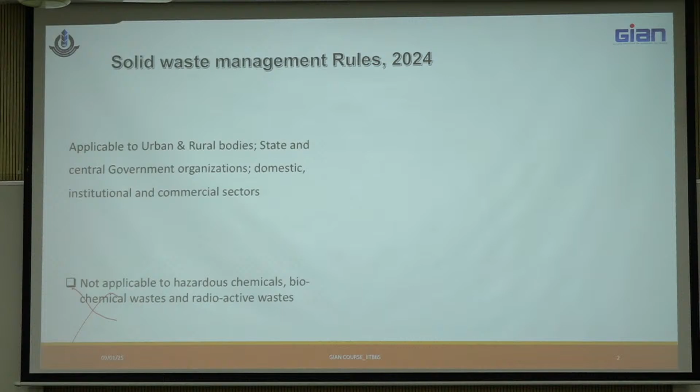Now with this latest amendment and advancement in the solid waste management rules, we are focusing on proper waste management with circular economy in place. Because in earlier days, we used to think of disposing of the waste so that it is not harmful to the environment, right? So it was more focused on a linear economy: waste generation at the source, treatment and disposal. Now we have to reduce that disposal part, landfilling of the waste even after treatment, and we are trying to include the circular economy concept so that we can generate some revenue out of waste.

So you might have heard so many terms: waste to wealth, waste to energy, trash to cash, right? Because we have to implement that circular economy and gain some revenue out of waste instead of just disposing it onto land. And more strengthening will be coming in the monetary aspect for penalizing the defaulters. And no sector is excluded. Waste management is not only the responsibility of urban sectors. We have to look into rural areas as well for the overall improvement in environmental quality. So all of us are responsible for waste segregation from source, and as waste management engineers, we are responsible for implementing circular economy in waste management.

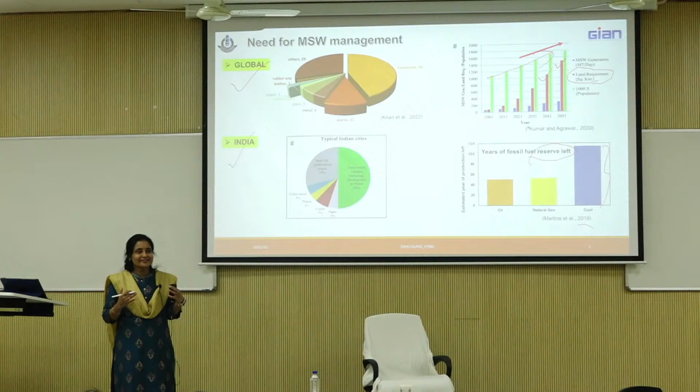And coming to the other aspect, the use of fossil fuel. So advancement in, say, vehicular transport, industrialization is demanding more and more fossil fuel in coming years. And if you see the fossil fuel reserve left, as per the study in 2019, so we are around 5 years ahead from this study. So even this study says the maximum coal reserve is up to 100 years, and natural gas and oil reserve is for less than 50 years. But we cannot think of a life without coal or fossil fuels. What if the reserve is no more? So we have to always think of an alternate coal or fossil fuel. But where is the source? Naturally, to generate the fossil fuel, it takes millions of years. So let us think of our waste to be converted to an alternate fuel, either solid or liquid residue.

So this is the waste generation. The predicted waste generation in a global average by 2050 is around 3.4 billion tons. So if you see the current scenario in India, we have around 62 million tons of waste generated per year, averaging to around 1 kg of waste generated per person per day, right? And most of this waste collection is not done, and from the collected waste, around 90% is only treated. So by keeping into account the less land availability, more waste generation, depletion of fossil fuel reserve, let us think of the opportunity for waste to energy conversion from the ample source of resource, that is the waste generated from different parts of the world.

Now, if you need to convert waste to energy, especially through thermochemical conversion techniques, it has to meet certain criteria. So as per the rule, it says non-recyclable. As I mentioned, we have to go for reduce, reuse, recycle. So if the 3R fails, the rest non-recyclable part of waste, which has a calorific value of at least 6.3 megajoules or more, can be utilized for generating energy. So this has a potential for converting into energy through thermochemical routes. It can be directly used as a fuel or can be converted into RDF by suitable pretreatment technique.

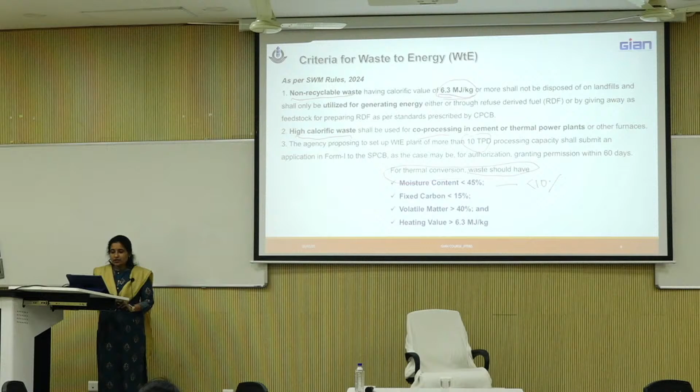Okay. And the next is fixed carbon content. Fixed carbon content should be 15% or less, and volatile matter should be more, because this is the volatile matter which is being converted to fixed carbon during the conversion process. So volatile matter content should be more, and as mentioned earlier, the heating value should be more than 6.3 megajoule per kg.

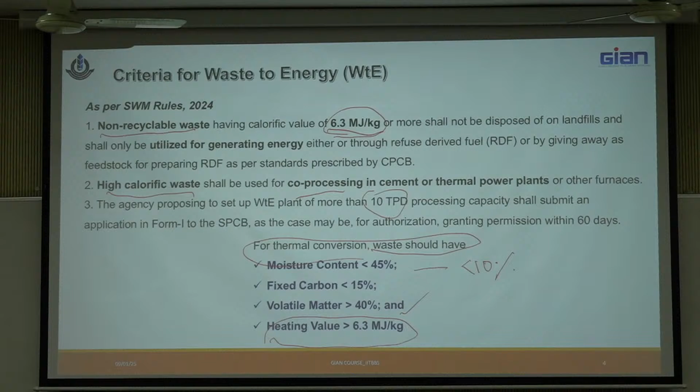So if any non-recyclable fraction of waste is meeting these criteria, you can think of waste to energy conversion. And if the capacity is more than 10 ton per day, get prior approval for setting up the waste to energy plant. So I'm just reiterating the same thing.

What is the need of MSW management, and waste management by generating energy out of it? The increasing population, increase in waste generation, and imbalance in the waste management sector is one aspect. And industrialization and energy demand in par with the depleting fossil fuel reserve demands more energy sources. So let us put these two together to make our waste to energy conversion a demanding area.

And this waste to energy conversion can address the imbalance in waste management as well as the depleting reserve, so that the waste is managed properly and the energy demand is met by the energy created out of the waste to energy process.

So just addressing two major SDGs, we can say affordable and clean energy from the waste converted through different processes to energy. So it can be thermal energy or the solid or liquid biofuel or biochar that is produced from the waste to energy conversion process. And of course, it can give sustainable cities and communities, clean cities.

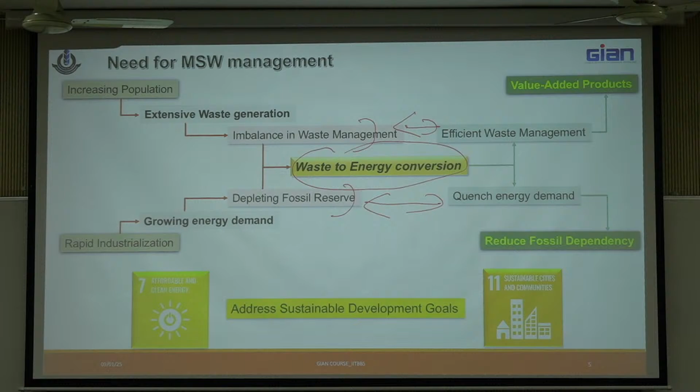So this directly caters to these two sustainable development goals, and indirectly it is meeting many other SDGs, for example, health and hygiene, right? So all this is met if you go for waste to energy conversion techniques.

Now, where can we use the RDF or even the agro residues directly, right? So if you are thinking of a waste to energy plant, who will be the buyer for the converted product of your waste to energy facility? So if you have the segregated combustible fraction from MSW, SCF, or even many of the agro residues have calorific value more than 6.3 megajoule per kg.

So in par with our SWM rule, this can be used as a fuel in boilers or thermal power plants. Or if you want energy densification, we can go for converting this into RDF, as I mentioned previously, by removing the moisture, shredding and size reduction. Pelletization or compaction can be done for energy densification.

And if you are doing energy densification, we are getting high energy content, which is in par with the conventional fuel used in thermal power plants or cement kilns. So we can go for the intended application, like it can be used in boilers for heating if the energy density is comparatively less. The densification can cater its use in cement kilns or thermal power plants, either as a sole source or co-processing with existing fuel like coal.

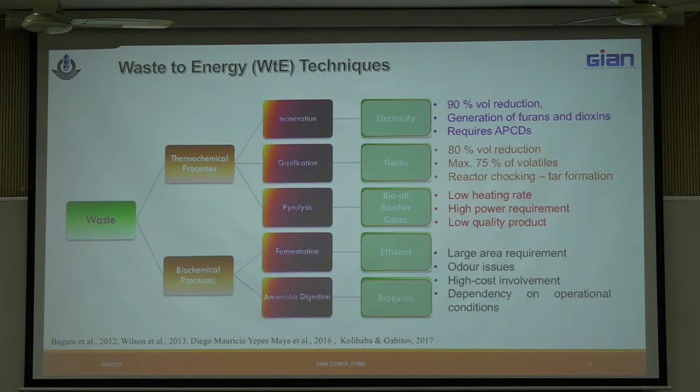So it is left to the wisdom of the waste to energy operator to go for a suitable technique catering to the type of waste and the operating conditions that you can maintain. So if you see the existing commercial waste to energy plants, we have many incinerators, which take the combustible fraction of waste. And coming to the biodegradable fraction of solid waste, anaerobic digester is common, or I can add even composting to it. Right? The 2 major streams to cater: the non-biodegradable waste and biodegradable waste.

But if you see these waste to energy techniques, especially if you go for incinerator, it is not carbon neutral, because we are depending mainly on the electricity. We need to go for auxiliary fuel for still burning of waste, especially for removing the moisture content and so on. And if you see the anaerobic digester, it is a slow process, or it may require large area. And most of the waste to energy techniques in place at present are centralized facilities. So what is the drawback with centralized facility?

Continuous supply, air pollution. So if you have a centralized technique, transportation, right? It involves high storage and transportation cost, because if you see the nearest facility, and this campus, IIT Bhubaneswar, is the source of waste generation, and if I want to transport the waste generated to Bhubaneswar city, you can think of the transportation cost, the pollution involved during the transport, right? And of course, for transport, we are again depending on fossil fuel, right? So this involves high transportation cost, storage cost, and the centralized facility.

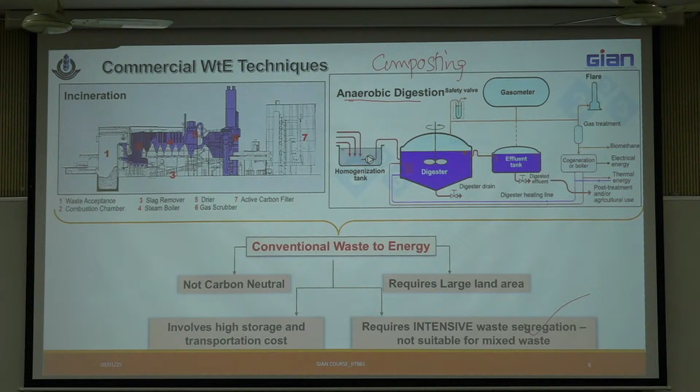Segregation is the major issue, and we are trying to make different ways of segregating waste, again emphasizing the solid waste management rule, the waste segregation from the source. So this is a typical case study of a material recovery facility in Bhubaneswar. Bhubaneswar city again emphasized waste segregation from source.

The wet waste and dry waste is separately collected, and the waste that is arriving at this MRF facility is further segregated, because even if you go for a wet-dry segregation process, the wet waste is collected in a plastic bag, right? The food waste is collected in the LDPE, the garbage bag, which is plastic. So again, we need to go for one segregation at the facility, and the biodegradable fraction,

which is going to AD or compost, anaerobic digester or composting process, to get the humus or compost, and the rest of the combustible fraction or non-biodegradable fraction is compressed, densified, and used as RDF, refuse derived fuel, and this finds its way to the nearest cement kiln in Bhubaneswar city.

But if you see the economics of operating this waste management facility at Bhubaneswar, the expenditure per month, which includes the salary of the manpower, human resource, consumables, electricity cost, vehicles for collection of waste from different corners of the city to this MRF facility, totals around 18 lakhs per month in one composting facility or one MRF facility in Bhubaneswar. We have many such facilities in the city.

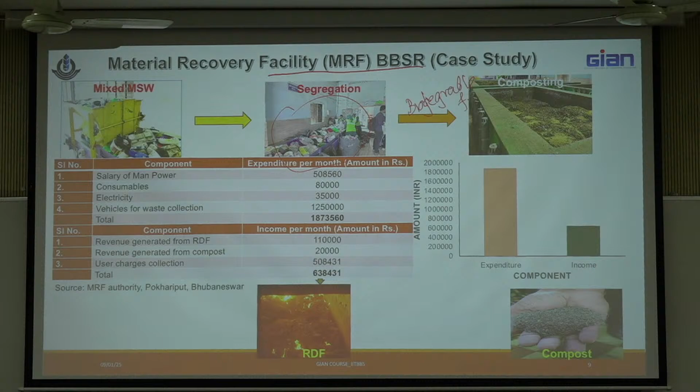So there is always a need of advanced techniques. There is no single solution to cater to all this, but let us search for a facility which can take mixed waste, convert it into value added products, and with the same process or technology deliver a variety of products based on the feedstock coming to that facility, and of course in a quicker manner: rapid conversion with good quality end product, easily controllable operating parameters, and of course profitable, right? At the end we need money.

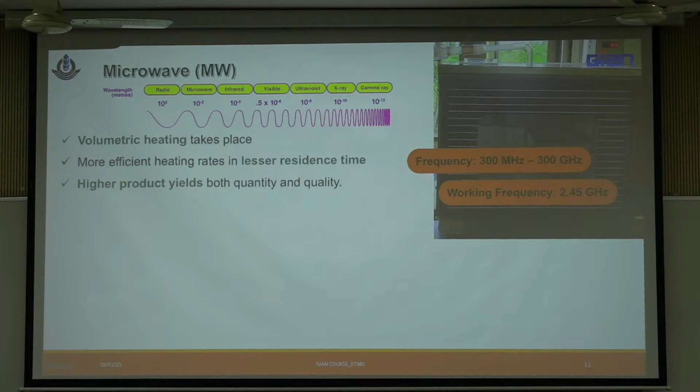So we are looking at whether microwave assisted pyrolysis can address a few, many, or all of these requirements for our waste to energy facility. What is microwave? All are familiar with the microwave oven, but where does microwave lie in the electromagnetic spectrum? It is of high wavelength, 1 millimeter to 1 meter. The energy of microwave as such is very less. You may be familiar with using UV, ultraviolet rays, because its energy is high, so it can disrupt chemical bonds, right? And even pollutant remediation can be done with UV.

Microwave is a comparatively lower energy region, but it has some specific heating potential. It has the heating mechanism of dipolar polarization. This is how the dipole will get reoriented in the microwave to get the medium heated. And the other one is conduction mechanism, by the free electrons that can move in the medium on irradiation of microwave. And interfacial polarization is a mix of the dipole orientation and conduction mechanism.

So consider pure water, mineral water and tap water. If we keep them in the microwave, which one do you expect will be heated up? Say demineralized water, no minerals, and on the other side tap water with a lot of minerals or pollutants. Tap water: here the mechanism is conduction, and if you have some dipoles, the dipolar orientation can also help in heating up the pollutants.

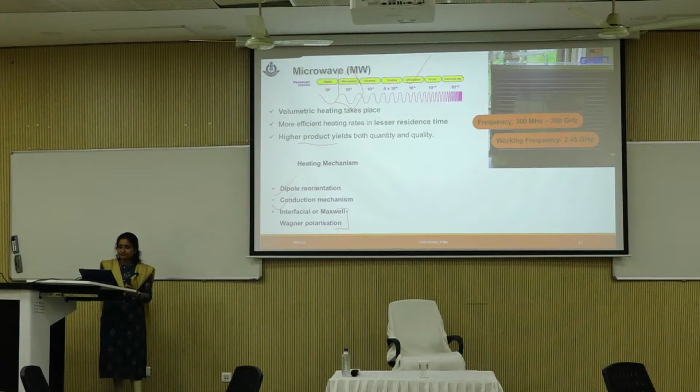So if you see the temperature profile inside the microwave reactor versus a conventional heating process: in a conventional heating process, heating is by conduction, so the periphery is heated first and then the interiors. It is just the reverse in the microwave reactor, inside out, not the movie, it starts from the atomic level and goes towards the periphery. But will all materials be heated up with microwave?

No. So can I use all types of waste to be converted by microwave assisted pyrolysis? No. If not, again the segregation will be an issue, right? So how can I segregate the collected waste based on which can be heated by microwave and which cannot be heated by microwave? Should I go for that?

See, we are going for a technique which can avoid segregation of waste. And now if you tell me I have to segregate the waste based on which will be heated up or not heated up by microwave, I cannot address the issue.

For example, I can say food waste, right? Biomass will be heated up by microwave because it has carbon content. Carbon is a good absorber of microwave. You can even expect a temperature of more than 1000 degrees Celsius with a carbon containing material in microwave. It has a specific phenomenon called hotspot formation.

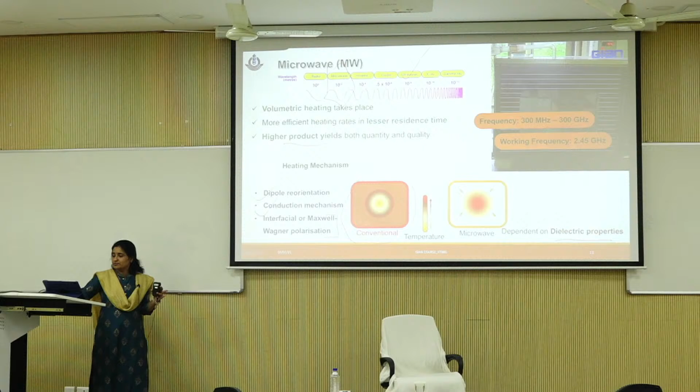So I can make a material which cannot be heated up in microwave be converted by a microwave assisted process, provided I use a microwave absorber or susceptor. So here is the role of the microwave absorber or susceptor. If a non-microwave absorbing material has to be heated up in a microwave oven, we can think of a susceptor. Now what is a susceptor? It has a good dielectric property.

So here let me take you through the dielectric constant. So what is dielectric constant? It is the ability of a particle or a material to absorb electromagnetic radiation. The electromagnetic radiation we are talking about here is microwave, right? And the dielectric loss factor is the amount of the absorbed electromagnetic radiation that is converted to heat.

Now I have a term here, loss tangent. So the loss tangent is high. What does that mean? The equation for loss tangent, you can see, epsilon double prime by epsilon prime. So what if the loss tangent is high? Conversion is high. The absorbed electromagnetic radiation is mostly converted to heat. So if I have a material with good loss tangent, we can expect an increased temperature profile inside the microwave.

So these are different properties. It should have good dielectric property, that means it should absorb microwave. It should have high loss tangent, that means the absorbed microwave should be converted to thermal energy. And the thermal energy should be dissipated easily to the biomass or the waste that you are converting. And while doing all this, it should be thermally stable as well. So we should think of a microwave absorber or susceptor inside your reactor which can cater to this.

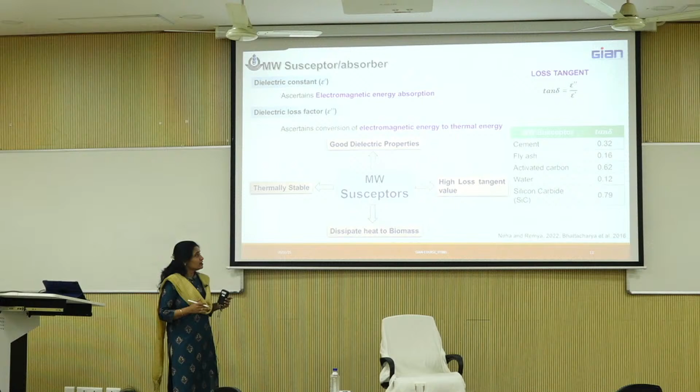So we have tried several such materials: cement, fly ash, activated carbon. Carbon is always a microwave absorber. We will not add water into waste, but water content in the mixed waste can also act as an absorber in your microwave pyrolysis process. And silicon carbide; now we are using zirconium alloy, which has an even higher loss tangent than silicon carbide, to increase the heating profile.

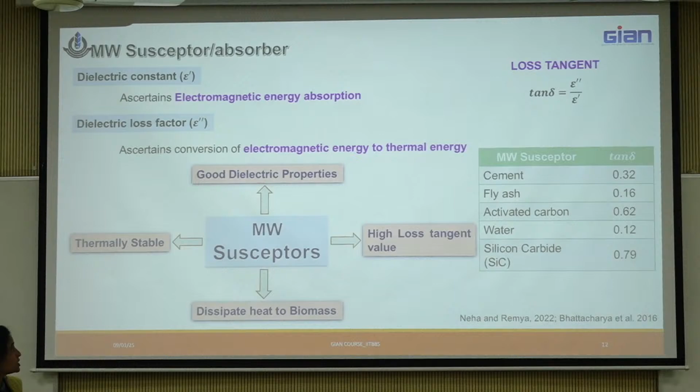Yes, so we can use microwave for waste to energy conversion, even if the material cannot be heated up by microwave, by using a suitable absorber or susceptor, and by setting the temperature. Here I am not going into pressure based technologies. Hydrothermal liquefaction and hydrothermal carbonization are pressure based, but here just by playing with the temperature we can convert the microwave assisted technique into torrefaction, pyrolysis or gasification. It mainly lies in the temperature range, and we can fix the microwave power range so the temperature is retained within the required limit.

For example, if I go for comparatively lower temperature, say 200 to 350 degrees Celsius, we can think of using lower microwave power and longer residence time, so that volatilization will not happen, rather it is carbonization to give you biochar. So you will yield more solid residue if you go for torrefaction.

Pyrolysis, again, has three variants: flash, fast or slow pyrolysis. All this differentiation is because of the heating rate, and the heating rate is because of the microwave power that you select. So of the three variants, slow pyrolysis will yield more biochar, fast pyrolysis bio oil, and flash pyrolysis is on par with gasification to yield more gaseous product.

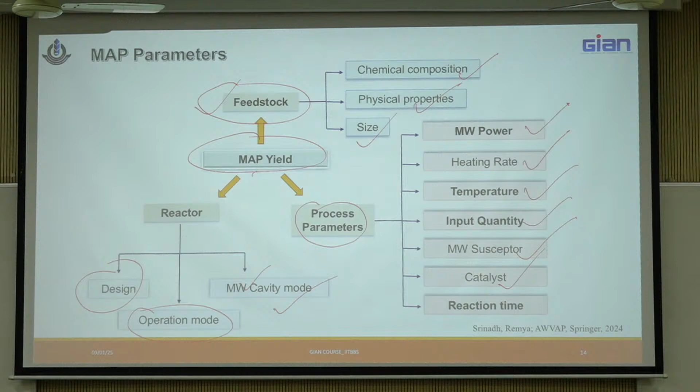Now coming to the process parameters, yes, here we can play some role, because we have little to do with the feedstock, and so is the reactor fabrication. So in the operating condition, you can think of setting the microwave power. Heating rate can be controlled by using suitable susceptor or microwave power, and what temperature you want to do the conversion process, quantity of feedstock taken per batch, which susceptor you are using, or you are going for an additional catalyst or reaction time. All these can play some role.

And of course, again, the end products. I will not spend much time here because this was the point of discussion in the last session as well. The biochar can be used for soil quality improvement, or it can be modified to use it for water and wastewater treatment, and it can be used for electrochemical methods because it can be used as an electrode, good conductor, and of course as a fuel.

And coming to bio oil, again it can be used in pure synthetic chemical production, or can be used as fuel for petrochemical industries or power generation. So keeping this, we are doing different microwave assisted pyrolysis for a variety of feedstock. We started the microwave based study around 2007 or so, and now we have done the conversion of different varieties of feedstock, starting with food waste, crop residue, forest residue, polyculture, microalgae.

So here we have isolated microalgae from a nearby pond. It is a mixed culture, and then it is grown in wastewater, specifically grey water. So grey water was the medium for microalgae. The grey water was treated, microalgal growth happened, and the microalgae was then converted to biofuel. So it's gone through a stepwise acclimatization process and so on.

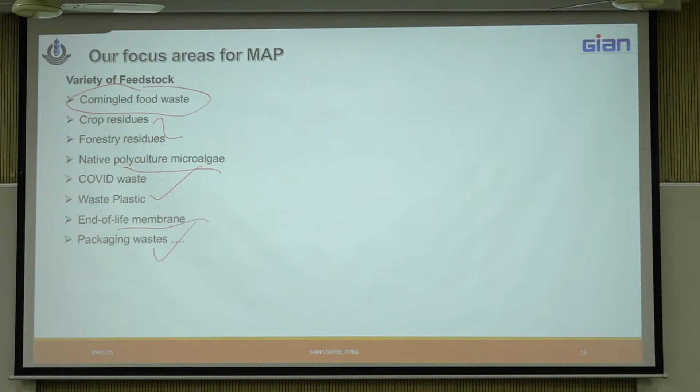Why mixed food waste? Because we are emphasizing on segregation. As I mentioned, we have a lot of food waste generated, starting with the non-eaten, or the different supply chain of food production, starting from the crop production, processing, then the food processing and so on. So a lot of food waste is generated, and plastic, once it is no longer in use and discarded, we call it plastic waste, because we have to reuse as far as possible.

So most of the time we get food waste and plastic waste together in the dustbin, right? So if you want to take this to a biological treatment process, the bare minimum thing you need to do is the separation of the garbage bag from the food waste. So we just thought, instead of disposal, dumping, landfilling with its own pros and cons, why can't we convert this mix as we collect it from the garbage bin in a MAP reactor into end products.

So I'll just present a few of these results from the study of converting the mixed waste through MAP into bio-oil and biochar. As we know, food waste is not uniform in nature. The waste you get today in the dustbin is not the same as tomorrow. So we just thought of collecting an average food waste composition. And you can see there is a lot of variation.

Now, if you want to go for thermochemical conversion technique, I think this question was pondered in the last session also: what can be the first step to understand your waste for its thermochemical conversion potential? To me, it is the TGA. We can perform the thermogravimetric analysis and see the degradation profile of your feedstock with respect to temperature.

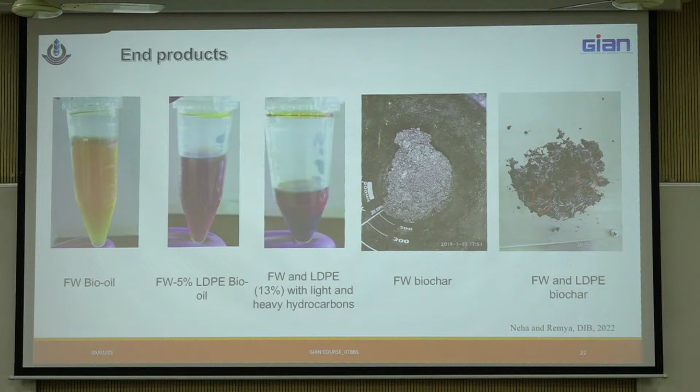Now coming to the optimization, process optimization, we can think of optimizing the operating parameters. So here we have tried with the temperature, percentage of LDPE in the feedstock, and the residence time to get the maximum bio-oil yield with minimum total acid number, TAN. Higher the TAN, more will be the corrosivity of bio-oil. So we have to reduce TAN and increase bio-oil.

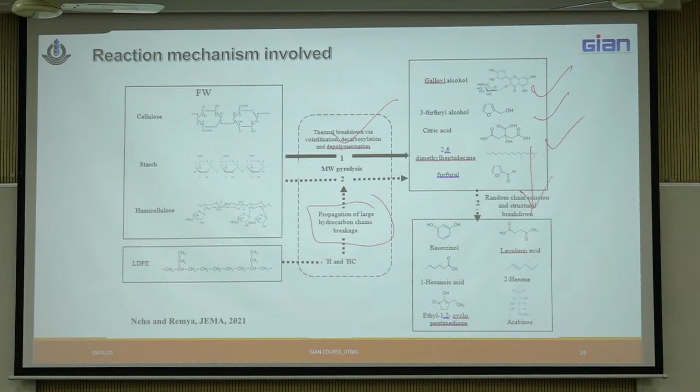So if you extend the time, this is again by cracking or thermal degradation, we got different products. While extending the time, we can expect further cracking of the product generated in the first stage to yield you more and more end product by scission of the long chain hydrocarbon. But at times, as we have seen earlier, the bio-oil from food waste is mostly moisture, and even with 5% LDPE content, the quality of bio-oil is not that good. So we can think of upgradation of bio-oil.

So this is what we have done for upgrading bio-oil to biodiesel or biofuel standard. The bio-oil is taken through a hydrodeoxygenation process, HDO process. The main aim here is to remove the oxygen-containing functional groups or the oxygen as such from the bio-oil, so that the heating value can be improved. So we are adding hydrogen at high pressure, high temperature condition in presence of catalyst, so that oxygen is expelled out from your bio-oil to improve the quality. And different reaction mechanisms are involved: hydrogenolysis, hydrogenation, dealkylation, dehydration, so on and so forth.

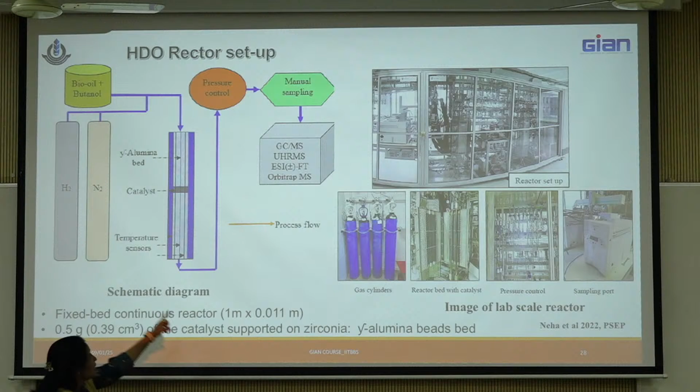So this is the HDO reactor setup. In this HDO reactor setup, you can see the bio-oil is mixed with butanol. Butanol is used to reduce the tar formation or increase the fluidity of your bio-oil. And then this is taken through the column of alumina bed, making the bio-oil flow smoothly through the catalyst. And the catalyst, again, we have prepared our own catalyst, which is supported on zirconia, and this is housed inside the alumina beads. You can see the entire column of alumina beads with the catalyst, which was supported on the zirconia bead. And this was regulated by temperature and pressure. So we checked the effect of different temperature and pressure on the quality of upgraded bio-oil.

So this is the actual reactor setup with different components taken separately. So the gas cylinder, this is the inside of the reactor column where the catalyst is placed, pressure control panel, and this is the inline GC-MS, so that the end product quality can be assessed.

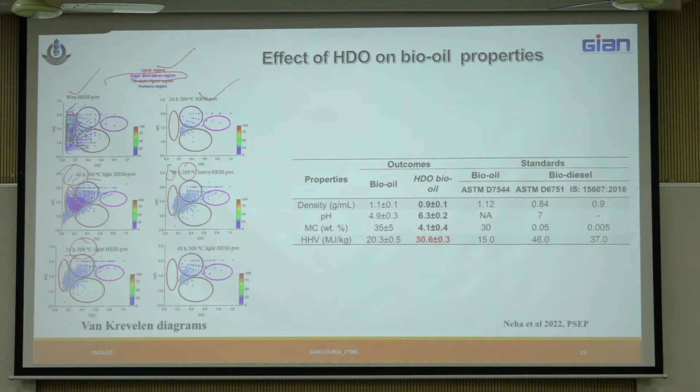So it means the quality is retained even after 60 days of storage, or I can say the stability is improved by the deoxygenation process.

Now this is the biochar. So the main focus of the study was on bio oil production, but as I mentioned earlier, we cannot expect only biochar or only bio oil from this. What we can do is maximize one particular end product. And here we are dealing with food waste, so I cannot expect 70% of bio oil coming from food waste. What we could get was around 40% bio oil and 40% biochar.

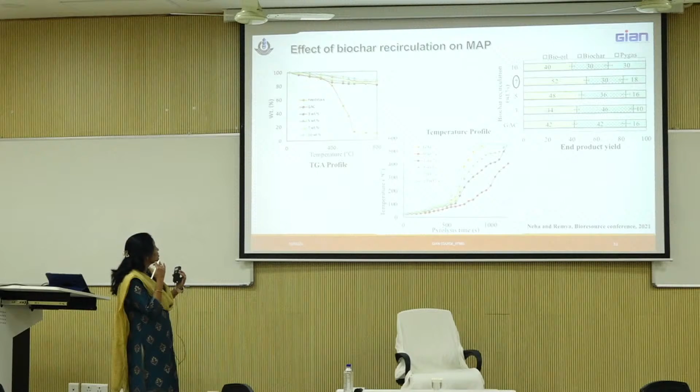So this is just to show the role of different susceptors. As we mentioned earlier, we can use GAC as susceptor, any carbon material for that sake. If you are not aware of which susceptor to use, you can just think of carbon, the best friend of microwave. So here we have used GAC at the first stage, and you can see the heating profile with increasing GAC, and the first run of MAP is giving you biochar and bio oil.

What to do in the second run? Again I will add GAC? Yes, biochar is again carbonaceous. So we thought of recirculating or reusing the biochar from the first cycle as a microwave susceptor in the second cycle. Increasing the percentage of biochar is increasing the heating rate. So you can rely on your susceptor in the first run of your microwave pyrolysis and try to use the biochar in the subsequent run as susceptor. This is giving a good heating profile and a better quality biochar as well.

So this is the TGA profile of the biochar obtained from different runs. So it's a stable biochar by recirculating. And if you see here the end products, with 3% biochar recirculation, it's almost 50-50 for biochar and bio-oil, 44% and 46% bio-oil and biochar.

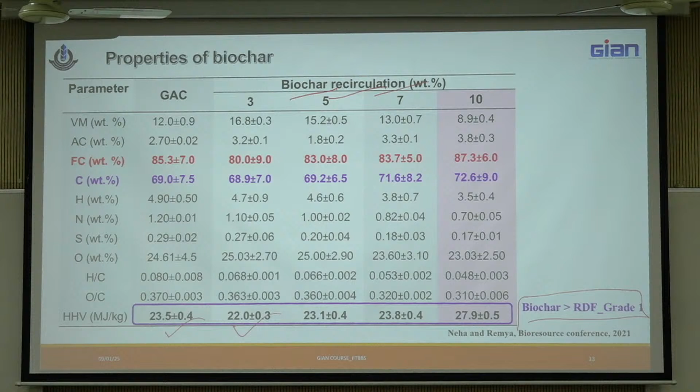So this is again the property of the different biochar. I'm not going into detail of this. I'll just mention that each of these biochars using different recirculation ratios of biochar in the subsequent run was giving very high heating value of biochar, much more than even RDF grade 1. Yes, we are always ensuring the uniform distribution in the feedstock.

The biochar as such is stable. So if you use it a second time, you are still retaining the same biochar, right? So we could get the improvements. The same biochar can be reused again and again. But the thing is, from the second round, we are getting a new set of biochar, right? So again, take a fraction of this and recirculate.

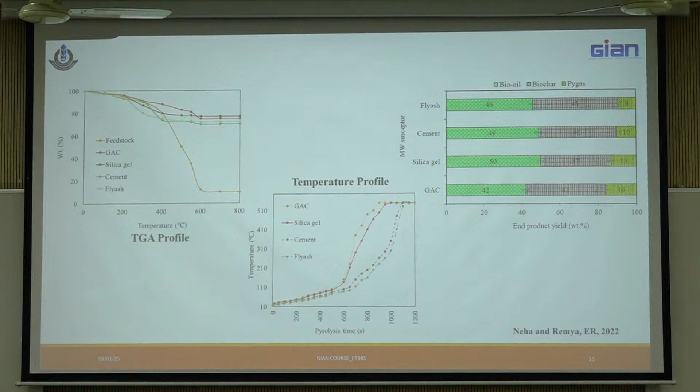That, I think, may be for a catalyst. So I have mentioned here. If you are using it as a catalyst for wastewater treatment, initially you have a biochar with some surface properties, surface functional groups, porous structure, right? If you are using it for water treatment, your pores may be clogged with pollutants. So maximum 1-2 times you can recirculate if it is an adsorption process. Otherwise, you have to regenerate the biochar for subsequent use.

But when you are using it as a susceptor in the microwave reactor, you don't need to bother segregating. Whatever biochar you get in the second run, you just recirculate a fixed percentage of that into the subsequent run.

My question is, how can you continuously heat the same biochar? Because in the first set you have biochar produced, right? A part of this you are recirculating with the new feedstock. So you get a new set of biochar. Now from that you can take a few percent of it and recirculate it with another set of feedstock. So new biochar is obtained. Because you cannot think of the same biochar in the MAP process. It is mixed with a new set of feedstock to give you a new biochar.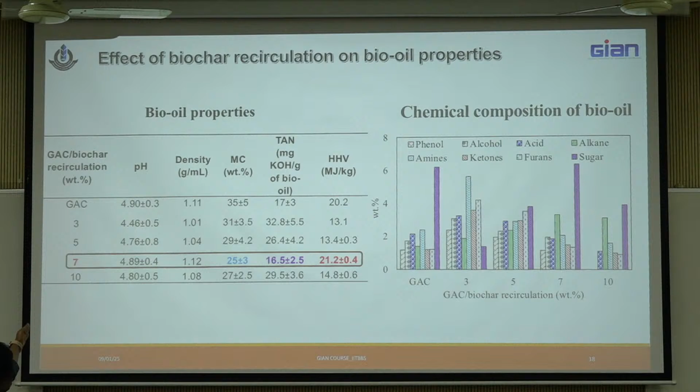So this is again the bio oil property compared with different standards, and as I mentioned, with different susceptors, with the different recirculation ratios, the quality of end product varies. The bio oil quality you can see with different percentage of granular activated carbon or 3 to 10% biochar recirculation, the pH, density, moisture content and so on. And so is the individual chemical composition in bio oil.

As far as our research is concerned, we are not looking into individual component fraction, but overall what is the pH, TAN value or heating value. So those who are doing research in synthesizing pure chemicals, they can focus on more detailed analysis of chemical composition as well.

So in a nutshell, this is what we are doing in the MAP process for waste to energy conversion. Take any waste for that matter, check its initial characteristics, do the TGA profile and see which temperature is suitable for its conversion. You can directly convert that into biochar or pelletize it to convert into biochar pellets. Those who are doing pelletized fuel formation, I'll suggest you go for pelletization before the microwave pyrolysis process, because it is very difficult to convert your biochar to pellets. You may need to add separate binders.

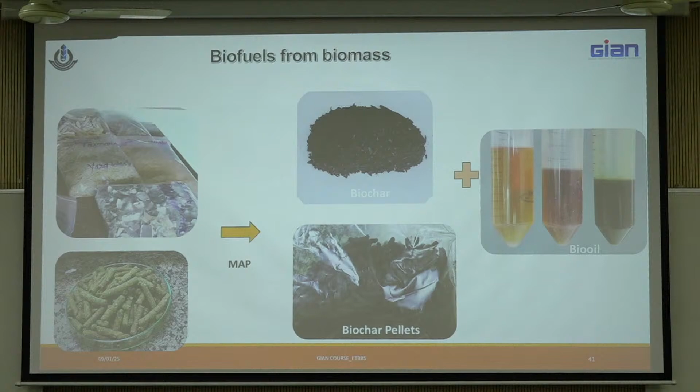So here the uniform heating, the credit goes to the carbon content in your feedstock. Because biomass has high carbon content, we can expect uniform heating. Even with pellets, we could get the uniform heating of the biomass. It is not a single time; different times were used. 15 to 20 minutes was the maximum time we have used for all this MAP process, not beyond.

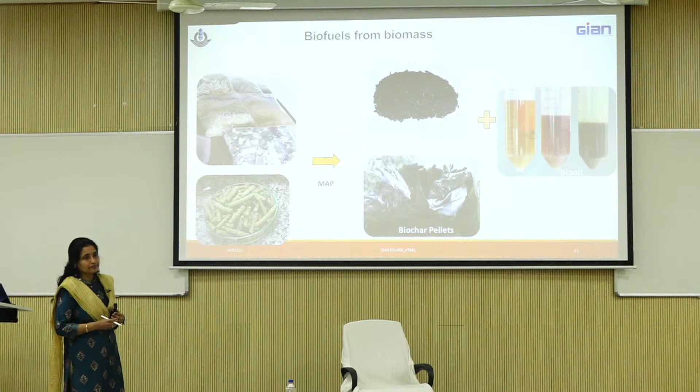So I hope now you will agree MAP has some role in waste to energy technique. Let us think of the waste that is coming from, say, agricultural residue, or even residential or commercial sources like food waste or plastic, or the waste from some industrial process. Let us take it through the MAP process, microwave assisted pyrolysis. Optimize your process for biochar production, oil production, or syngas production based on your aim, and then utilize it for subsequent processes. For example, biochar you can use again for industrial application as fuel, or it can be used in agriculture.

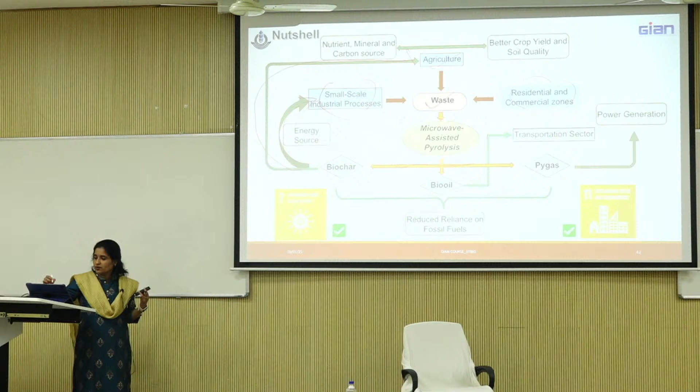It can be used as a slow release fertilizer in agriculture, or it can improve the water holding capacity of soil. So it has its way in agriculture as well. And coming to bio oil, from some feedstock the bio oil as such can be used as a fuel, or think of upgradation to use it as a fuel in transportation vehicles, and of course the pygas for power generation.

I hope we'll stop here, and this is the video of our pilot scale microwave pyrolysis reactor, which is completely working on solar power. It has a shredder mounted on the surface, which can shred your feedstock into the required size, and we are converting anything and everything that we get, trying to optimize the pyrolysis condition to convert it into value added end products.

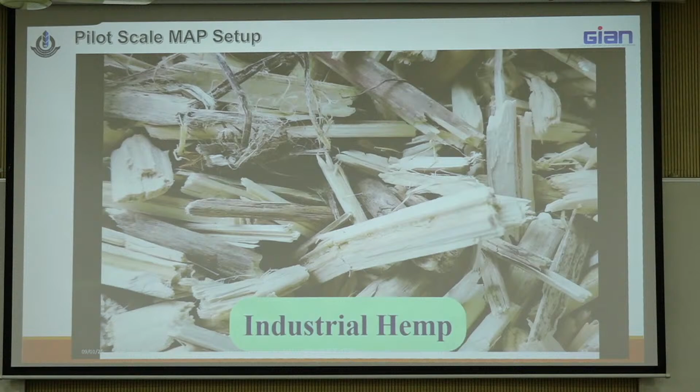So these are a few feedstocks: plastic waste, hemp hurd, packaging waste, and these are some pellets which are later converted into biochar.

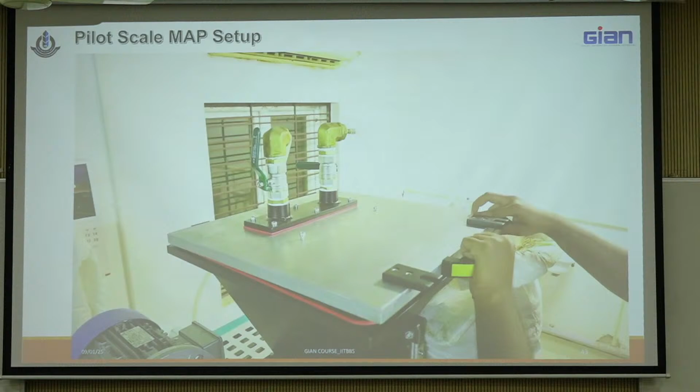So this is the membrane material from end of life RO membrane. We have used it again to convert this into bio oil. So this will be shredded. Agricultural residue can be shredded in the shredder, and it will go to the pyrolysis reaction unit.

We have full process control to set the temperature, reaction time, and there are 30 different steps of setting the temperature and reaction time. So if you need a step temperature profile, you can have the temperature profile as per requirement. So this is the nitrogen flow regulator to make inert atmosphere inside the reactor.

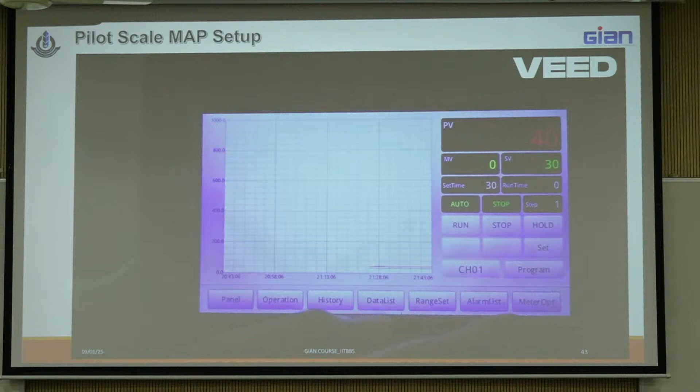The control panel to set the temperature at different steps. So you can set a step temperature profile as you need, and decide your reaction time, and we have 4 sets of magnetrons. That means it can operate in 6 kilowatt or 3 kilowatt based on the quantity of feedstock you need to process. And these are different end products obtained from the MAP process.

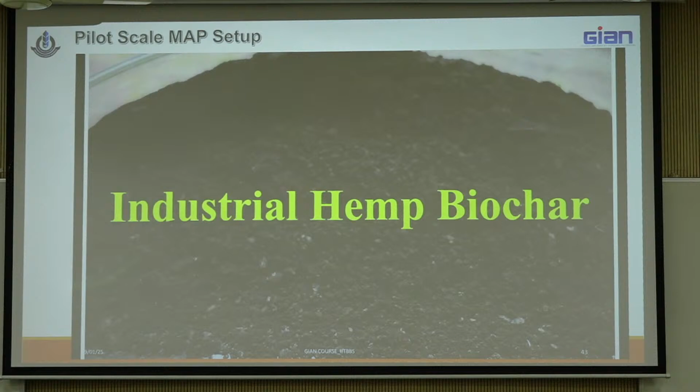The oil collection unit with 3 condensation units. So sometimes we can get even 3 different qualities of bio oil that are condensed in the subsequent condensation units. So these are some of the end products. Biochar from sawdust, the pelletized biochar. And various bio-oil fractions from multiple feedstocks.

We have calculated the net energy gain in terms of the total energy input. That was done for the lab scale reactor which was operating with electric energy, right? The energy input and the energy output in terms of the heating value and the yield of product. So most of the time you are getting a net energy gain of more than 100%. That means the energy input, what we give, in terms of calorific value, yes. At the optimum condition it is more.

Yes. See, again the microwave can take the water because water is a microwave susceptor, but then the quality of end product may vary, especially if you are going for bio oil. The feedstock with high water content will yield you bio oil with high water content. Right? So you can think of pre-drying, and we have used sun drying to reduce the electricity consumption. Up to 30% water content can also be easily taken into the microwave reactor, provided your focus is on biochar.

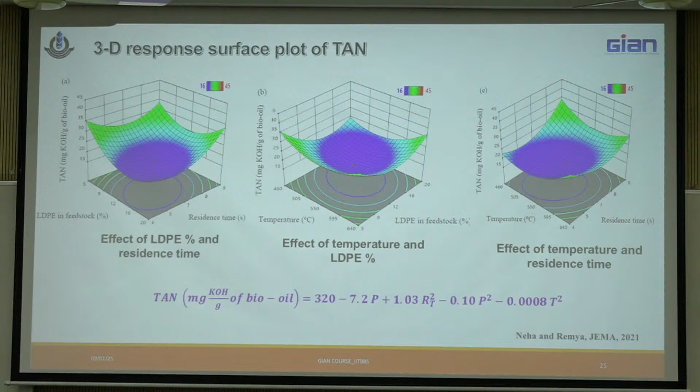P is the percentage of plastic. t is the time, the retention or treatment time, and T is the temperature. Total acid number. The more volatile cracking and its conversion into bio-oil. Okay, thank you.

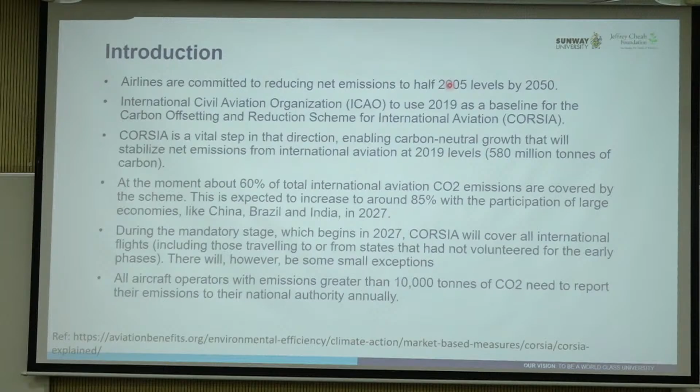So why is sustainable aviation fuel important? Because the airlines already committed to reduce total net emissions to half the level of 2005 by 2050. It seems impossible, because air transport is increasing year by year, besides the two years during COVID, almost doubling every 10 years. So how to cut it in half by 2050?

So they have phase by phase strategies. First, ICAO, the International Civil Aviation Organization, already established one benchmark, one policy, which they call CORSIA, the Carbon Offsetting and Reduction Scheme for International Aviation. So through this, maybe it might be possible. Later I'll tell you more.

This one is a very important step in order to reduce the overall emissions from airlines to half, or even to totally net zero. It is to enable carbon neutral growth. Carbon neutral growth means to remain. First step, to remain, as compared to 2019, not directly to reduce first, but to maintain compared to 2019.

So this is the very initial step, which, I don't know how many countries, this mentions 60%. Some countries already committed to this policy, and starting from this year they plan to implement 1%. I think many countries will be planning, because there is not enough demand. So that is the perspective of sustainable aviation fuel. What is the problem with demand? Later on I will tell you.

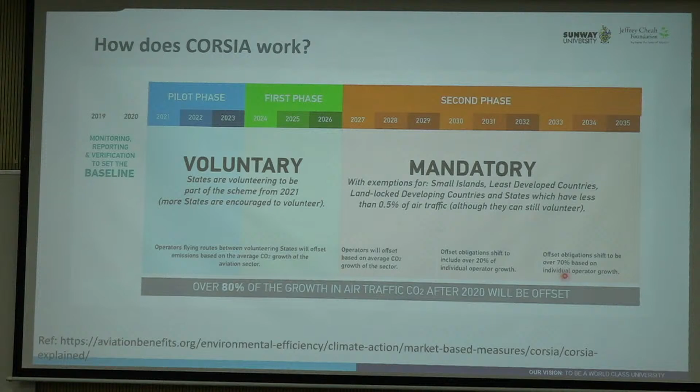So they have their own target, which eventually they will offset up to 70% of the total emissions. So that is the background, and that's why sustainable aviation fuel is important. So now we need to know what sustainable aviation fuel is. It is an alternative green fuel for aircraft, produced using renewable feedstock, for example waste oil and agricultural residues, so that SAF can reduce overall CO2 emissions by up to 80% compared to using fossil-based fuel.

So my initial question: what is the difference between sustainable aviation fuel and biofuel? Biofuel basically comes from organic material, from plants and animals. However, some of the sources are non-biological sources, which makes them not sustainable. Second, during production, we create some harmful emissions that I mentioned just now. So they prefer to use SAF, sustainable aviation fuel, instead of biofuel. What makes them different is not only that we want green fuel, but the process must be clean, and the raw material, the feedstock, must be sustainable.

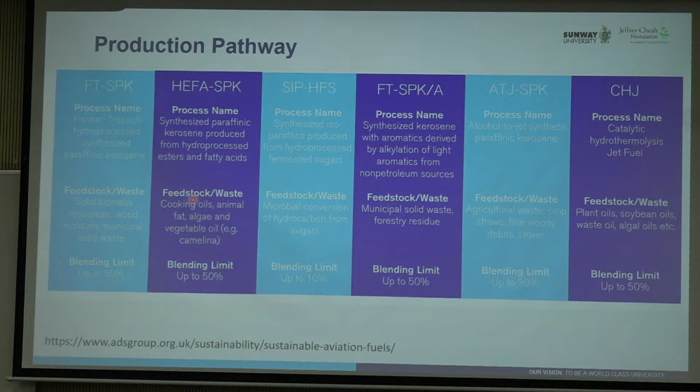What? The minimum can be a single step. For a single step you also need to depend on the raw materials. So for me, I use hydroprocessing, the single step. Later I show you the difference. You see here, they use 1 step, 2 steps, 3 steps from different techniques and different raw materials. So nothing wrong and nothing right.

So it must be much easier, because sometimes with 3 steps, after you convert you can get more pure sustainable aviation fuel. That's the thing. Much easier for you to convert, but a single step faces challenges. So maybe the overall yield might be relatively low. So how do you want to extract out the selectivities? Yep.

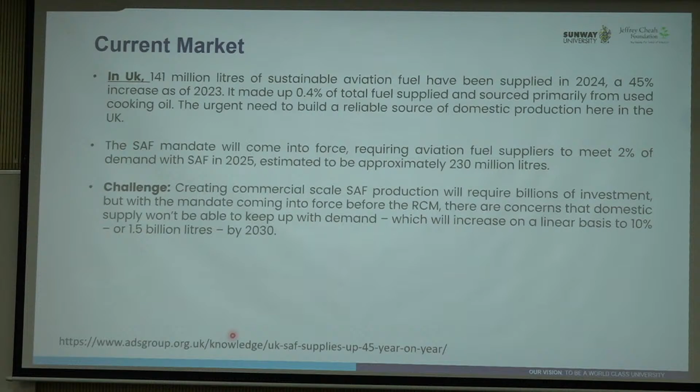If they want to increase to 10%, they need 1.5 billion liters by 2030, as already projected. So that's what the current market is facing. This is the brief introduction to sustainable aviation fuel. Now I want to move on to our study.

In this study, we want to determine what is most optimum. This is an exploratory, very fundamental study to find the potential raw materials available in Southeast Asia, tropical countries, and what potential pathway can produce biojet fuel. I didn't say sustainable aviation fuel first. To get the biojet fuel, we tried a lot of feedstocks and commercial catalysts without modifying the catalyst.

In the second phase, we will identify sustainable raw materials or resources we can use, then the targeted process and targeted catalyst that can reduce the overall CO2 and CO during the process, and get quality biojet fuel. In this study, we want to see the effect of different commercial catalysts and catalyst reusability. This one is more on catalyst activity.

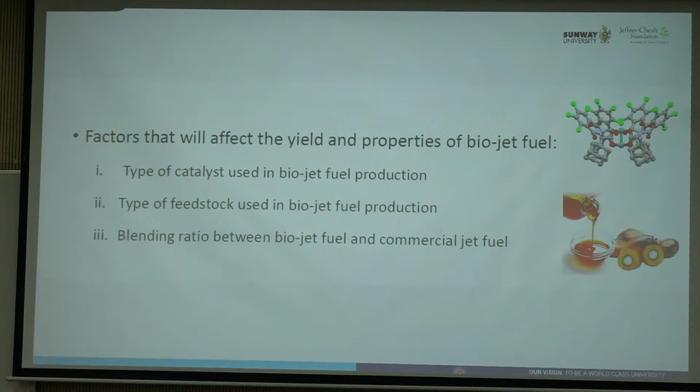So this is our scope. We identified five types of very common catalysts, with various percentages of loading. Then the catalyst reusability up to 5 cycles, to see what the effect is. Then for the feedstock, we identified 3 feedstocks, also related to palm oil, because in Malaysia we produce a lot of palm oil: palm oil based used cooking oil, palm kernel oil and palm olein oil.

So we particularly see which one is more suitable, because we really need to see the suitable selectivities, and the blending ratios we blend from 20 to 100%, increasing every 20%. For the fuel properties, we look at the chemical compositions analyzed using GC-MS, then the low temperature fluidity, combustion characteristics, volatility, and also the lubricity of the fuel we produce. Then another quantification study is the soot particle size. We need to know what the soot particle size is.

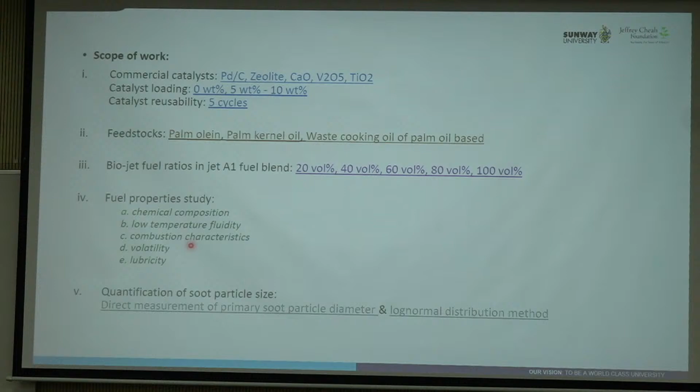So this is the comparison, because before we conduct the study we need to compare with other studies. This study we conducted in 2018, so there are more studies that have appeared since. As I mentioned just now, we are using the hydroprocessing method. Hydroprocessing methods are for oil-based or fatty acid-based raw materials. Comparing the criteria of production, some studies use a 1-step, 2-step, or even 3-step process. Nothing wrong or right. We chose to produce by the 1-step.

Normally for the 1-step, people use the deoxygenation or hydrodeoxygenation process with hydrogen, or some studies use pyrolysis or even co-pyrolysis. This one is co-pyrolysis of a mix of bamboo waste and microalgae. So they are able to produce biojet fuel, but currently the biojet fuel produced is of relatively low yield. This is the biojet fuel yield, not considering the selectivity yet.

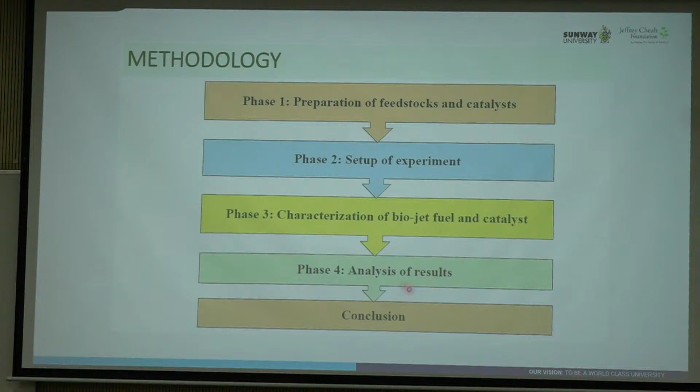So our steps are: prepare the feedstock and catalyst, set up the experiment, do the characterization, analysis of results and conclusion. This one is quite common. So here we are using the hydrodeoxygenation process without the pressure first.

This one is the fatty acid profile of the feedstock. This is not to produce the jet fuel yet. This one is to analyze what the fatty acid composition is only. To identify the fatty acid composition, we need to know the number of the carbon chain.

After that, we activated the catalyst. We refer to the literature for the optimized catalyst activation conditions and just follow those conditions, because we just want to see the potential. This is the jet fuel production. Our aim is to explore and figure out the potential feedstock.

We want to identify three best catalysts because we are using 5, then aim to define 2 best pairings. Pairing is: we have 3 feedstocks and 5 catalysts, which pair will produce the highest selectivity of biojet fuels. After that, we look at different catalyst loadings, blendings, and the reusability of the catalyst.

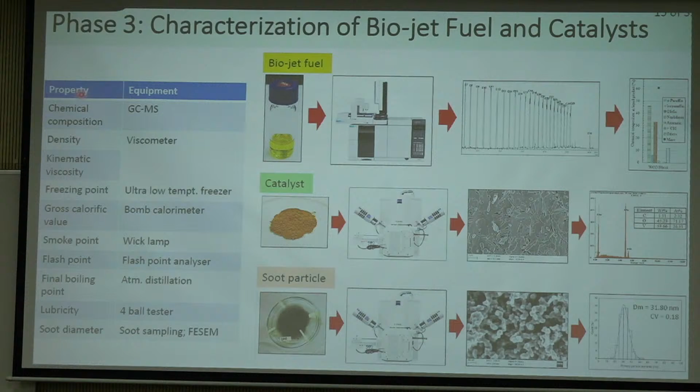Then we do the characterizations. As I mentioned, we use GCMS to measure the profile and selectivity, and we measure the viscosity. Viscosity is very important for biojet fuel or biofuel, and the other properties. Lastly, we also measure the lubricity and smoke point to see the potential emissions produced by using the biojet fuel.

After that is the analysis of the result. I need to make it clear that the mass yield we obtain here is the total product, all the product. For the liquid product, we only select the jet hydrocarbons. Then the jet paraffin selectivity: we just select C8 until C16 only.

We measure these things because we need to make sure what the compounds are after we produce. We don't just take the total mass, because total mass is not fair since some have other impurity profiles. So we look at the jet paraffin selectivity or the liquid product.

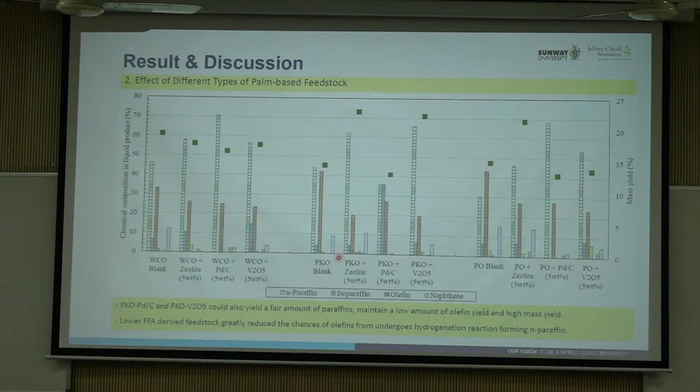Then after that, this one is the different catalyst loading, because we found that this one is the best one. So we used these two sets to further study the different loadings. We found that if the loading of the catalyst goes higher, the total paraffin also goes higher, with the total paraffin highest at 8%.

This one is the paraffin. This one is almost similar. So 8% is the highest for the palm kernel using the vanadium. Both are also higher, with the lowest olefin.

Then after that, we looked at the effect of biofuel blending. So we found that the 8% has the highest n-paraffin, so we just take the 8%. Blending, two types of the palm kernel. We take the 8%, then we blend with various percentages.

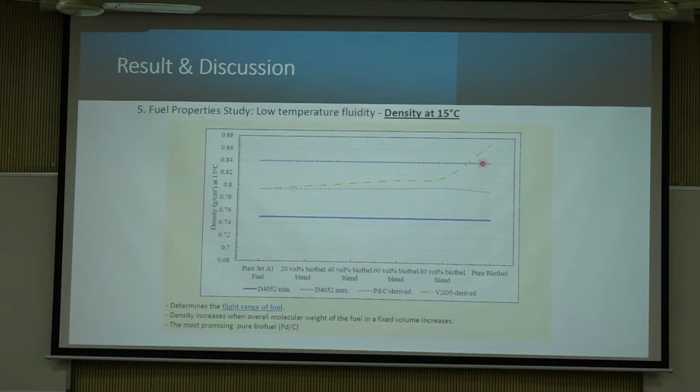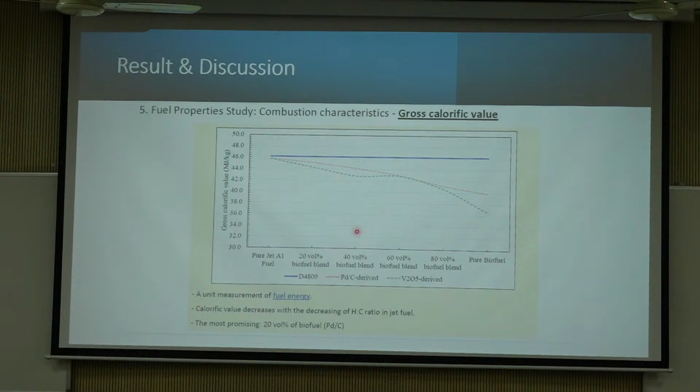Then lastly is about the calorific values. The calorific value must be, yeah, it's decreasing. Must be higher as well. So our benchmark is around 46 or 47 MJ per kg. What we get is also slightly lower. So that's why we need to make sure you have enough energy content per unit of the biojet fuel that you produce.

Then lastly is the flash point. Flash point is normally not a problem, because the flash point for the biofuel is relatively high. Flash point is due to what? Due to the storage and also the shipping and transportation issue. But normally the flash point of the biofuel is relatively high. So this is not the main issue.

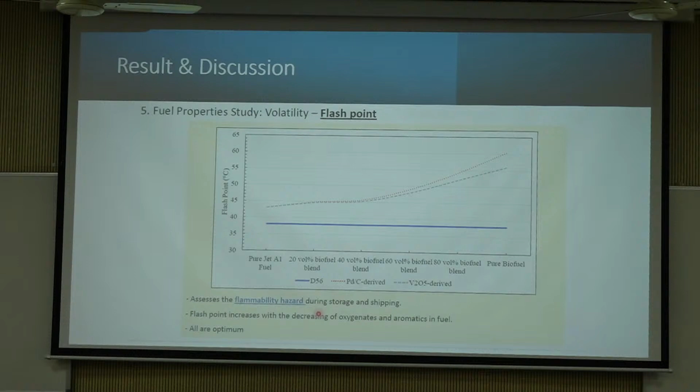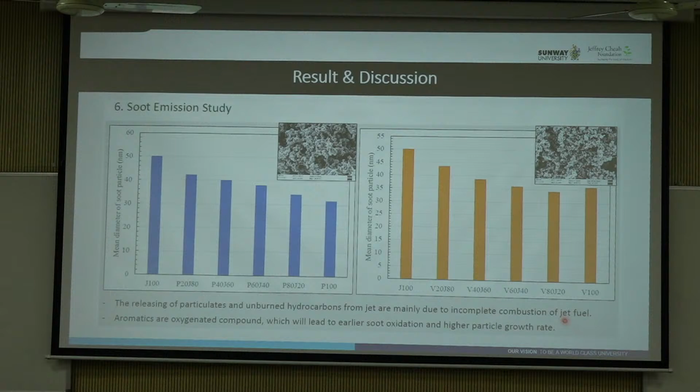Yep. So then lastly is about the soot emission. This one is also as expected, because the pure biojet fuel, or the pure biofuel, normally has lower emissions, due to the incomplete combustion of the jet fuel and unburnt hydrocarbons. Yep.

Then after that we tested the reusability of these two types of catalyst. We found that using 8% loading, it's up to 5 cycles. The total production, the reuse is still higher. But if we compare between the vanadium and the vanadium oxide, the vanadium oxide has the better reusability, because why? You see, it's almost not reduced in the total mass yield. Yep. This one also the same.

I think both have relatively similar results. They are quite stable, because why? This is one of the commercial catalysts without any modification. So they are quite stable catalysts.

So what are our main findings from this study? We found that of these two types of catalysts, 5% and 8%, 5% is able to make the optimal amount of jet hydrocarbons through the deoxygenation process for the waste cooking oil. Then the vanadium oxide catalyst has better reusability compared to the vanadium carbon. But for the palm kernel oil, the liquid products can reach up to 99%, with favorable selectivity, which is the palladium.

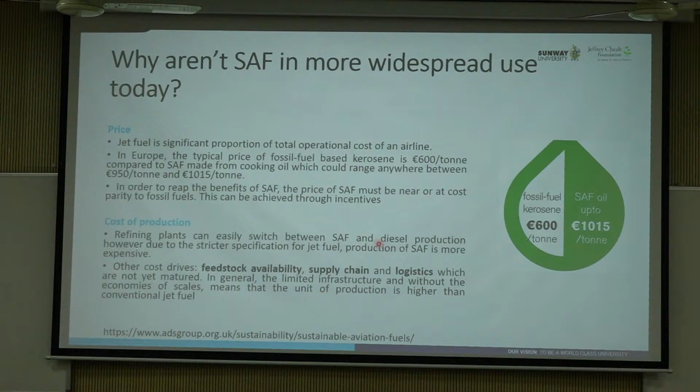So you need to make sure the price is competitive. Now they can achieve it through incentives only, because many countries want to push for sustainable aviation fuel. Another one, like you all mentioned, is the production cost. We need to make sure we have a stable supply chain, where we can get available sustainable feedstock, and also the logistics, because overall this sector is not yet mature, and current sustainable fuel heavily relies on incentives only.

If you want to know the overall production cost, you need to know the overall feedstock and also the pathway for any process. Because before we start any process, we want to know whether it's economically feasible or not. So you need to know the pathway for any type of feedstock or process, because later on I will discuss the overall life cycle cost analysis.

This one is oil-based feedstock. You go through the hydroprocessing of esters and fatty acids method, which I'm using. Then we also have sugar to jet. Another pathway that industry currently uses is gasification to produce biojet fuel. This is quite a stable and established process already, the Fischer-Tropsch process. So that is the pathway.

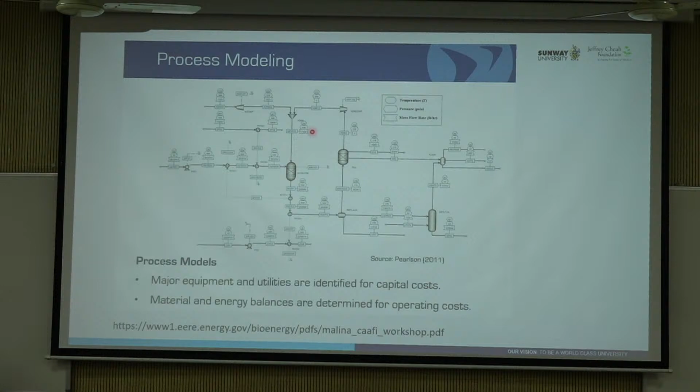Because we have the energy balance. The energy balance is shown very clearly in the process simulation. For our group, for the process simulation, we use Aspen Plus. Aspen Plus is very good for industry process simulation, not only used for research, but also very useful for industrial process simulation as well.

But the license is very expensive. There are two types of license. The academic license is relatively lower cost or affordable, but this license cannot be used for commercialization. If some company wants you to do the process simulation, you have that license because your institute got it, but you cannot use it for that company. If you get caught, your institution can get a very serious fine. It's very worrying.

No. If you yourself own that software, then you can do it for any country, any company. If you are the consultant for that company and you own that license, you can do it. COMSOL also is another good process simulation tool. So in our group we are using this one, but of course we are using the academic license. We didn't do any commercialization. Commercial has a totally different license.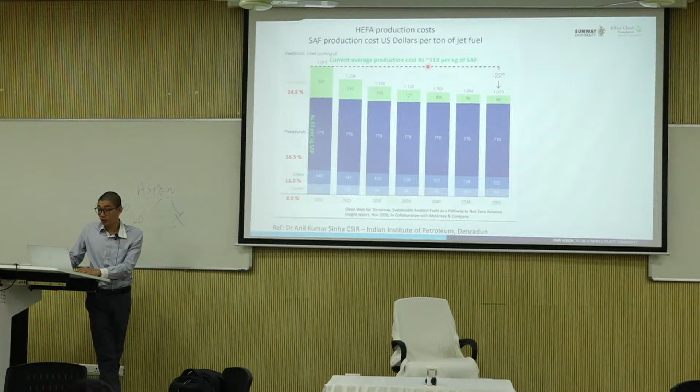Then this is the costing. I obtained this from one of the researchers from India. He's already doing costing in Indian rupees. You see the overall cost is 113 per kg at this moment. Where does the overall cost come from? Feedstock. The OPEX and CAPEX are almost similar. I also do costing, but for biodiesel. Later, I'll show you how to do this. I didn't do it for jet fuel yet, but the method is the same. So later on, I will show you my case study.

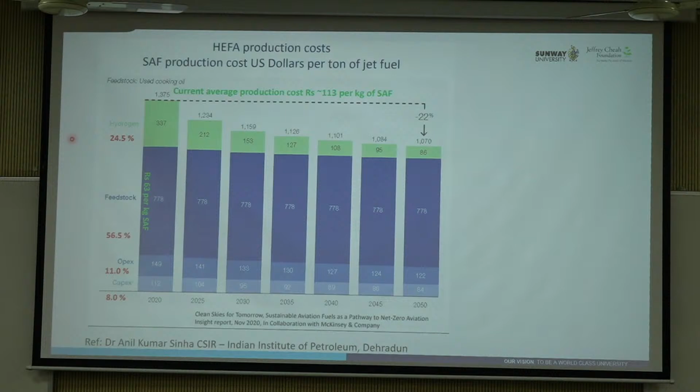So you see, overall, feedstock normally accounts for 70% of the overall price. So if you are able to get a reliable, sustainable, low cost raw material or feedstock, you can make it. OPEX and CAPEX are relatively small. Then they need the hydrogen. I assume he produced it using the hydrodeoxygenation process, because he included the hydrogen cost as well.

So what he predicts is the overall cost. So from here, what can you do? Besides the feedstock cost, the cost of the hydrogen is also relatively high, correct or not? So how are you going to get low cost, sustainable hydrogen production as well? There are two things that you can do. Then the OPEX and CAPEX are also very low cost. This is what I told you.

You see, we want to achieve net zero in 2050. Correct or not? I think most of you have heard this term before. Net zero in 2050.

So you see the emission is increasing year by year since 1990. Not to say since 1990; we have the data from 1990, because I showed you before that the 17th century already started the emissions. So you see it's already reached almost 1,000 million tons. It's almost the same as what I showed you the last few days.

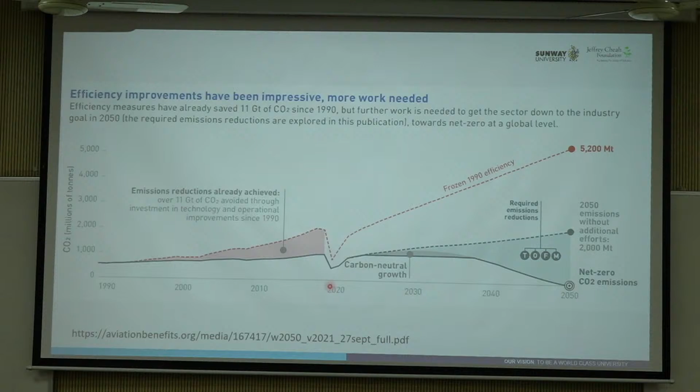No, that one cannot. It's not easy, because you see the healthcare system also consumes a lot of energy. Now even the healthcare industry talks about sustainability, how to recycle and reduce the healthcare waste. Not only healthcare waste, they want to make their overall system sustainable, the procurement system, all those systems, because now the healthcare industry is more profitable, in any country around the world.

So as a summary, we already achieved so much compared to 1990. I mean, without any policy, it would have increased along this line, so we already achieved so much. A flight today emits only half of the CO2 it did in 1990. So all the sector industries are working on ways to reduce fuel use and also emissions further. So any questions so far?

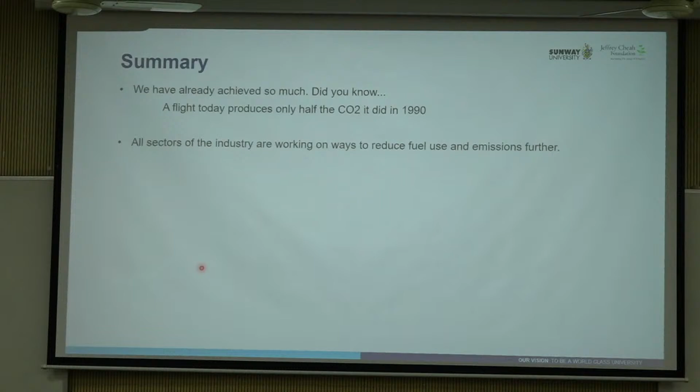I have another small slide to show about the life cycle cost, to show you how we are going to analyze the life cycle cost. So before I continue, yes. Soot particles. Yep.

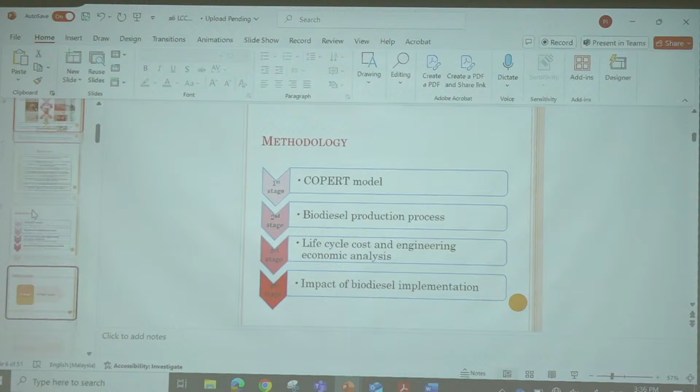So my time is until what time? I need to... 10-15 minutes. Okay, I'll just quickly show you something. If not, tomorrow I will show you.

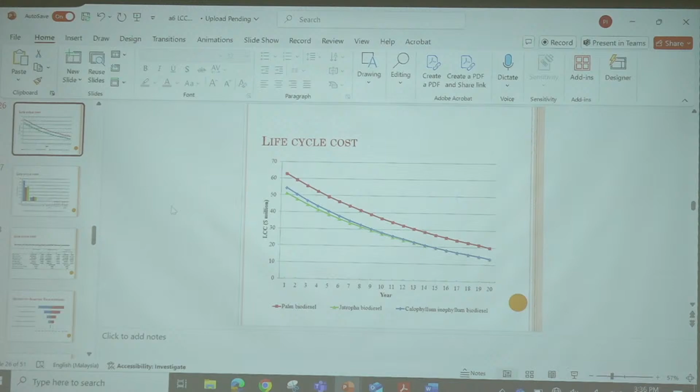You see, this one I didn't break down. In this study, this one is the same thing; I just didn't put in the proper breakdown of the cost. Break down the cost per unit. This one is the total cost per unit. Did I show it or not? I didn't show. Oh, this one I break down.

So you see, in this one, I show the life cycle cost for 3 types of biodiesel for a project lifetime of 20 years. This includes the overall initial investment cost, the operating cost, the feedstock cost, all the costs for the lifetime of 20 years, including the discount rate. Discount rate, you know. Discount rate, this one is very important.

Many people doing the life cycle analysis or the cost analysis ignore this one. Anyone know what is the discount cost or the interest rate cost? It changes for each country, but why do we need to consider it? Some call it the discount cost or the interest rate. Why? Correct, inflation. Because $100 today may be worth $90 next year.

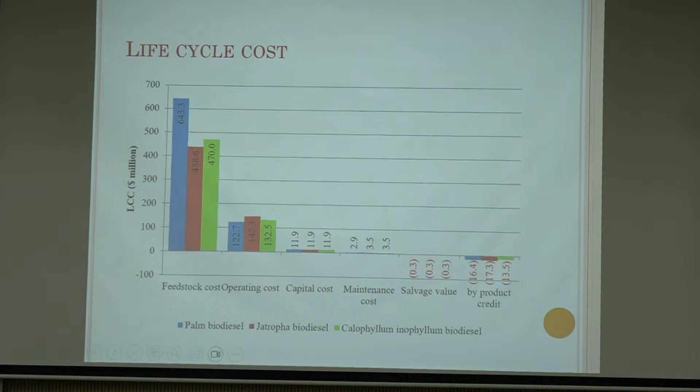So from this one, you see, we can break down the feedstock cost, how many percent. The maintenance cost, operating cost, capital cost, and also the byproduct credit. Because why? Biodiesel produces glycerol as a byproduct. Then what is the salvage value? At the end of 20 years, the value of your assets. This one I consider all. So these are all the costs.

Then from here, we can calculate the payback period and also the unit cost. So you see, I get almost similar results. The feedstock cost is 80%, 70%. Same for biofuel. Cannot run away from this one. That's the thing.

Cannot run away. So you see, this one I conducted 15 years ago. I'm still doing costing now, but I don't have the slides to show you. You can refer to my papers. Recently I have a few papers doing costing and life cycle analysis. This one is 15 years back, still the same. The feedstock cost is the highest for biofuel, especially biodiesel.

So what we can do more is the sensitivity analysis. This one I go one step forward. Why? Many prices change and fluctuate. For example, the crude oil price. If the crude oil price changes, what is the impact? If the discount rate changes, maybe sometimes inflation is too high, what is the impact? Positive or negative?

Oil conversion yield: if the technology keeps improving, you get a higher yield. Or the operating cost: maybe you can minimize the operating cost. So what is the effect? This one you can do.

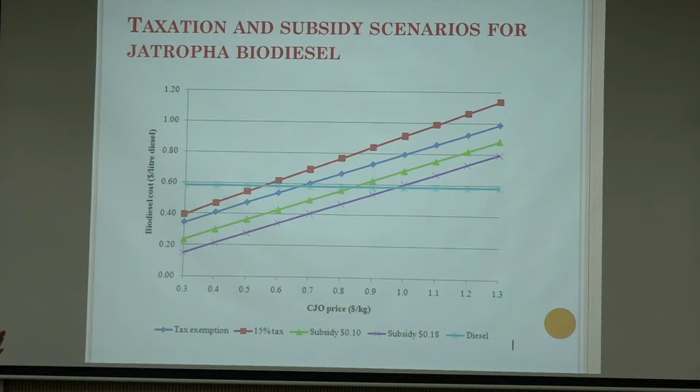This one is the three types of biodiesel, and I also did an analysis of what happens if the crude price or any price changes. So what is the production cost? Then the horizontal line is our current diesel cost. Of course, I did this one based on the Malaysian scenario. Every country has a different scenario. That is the cost.

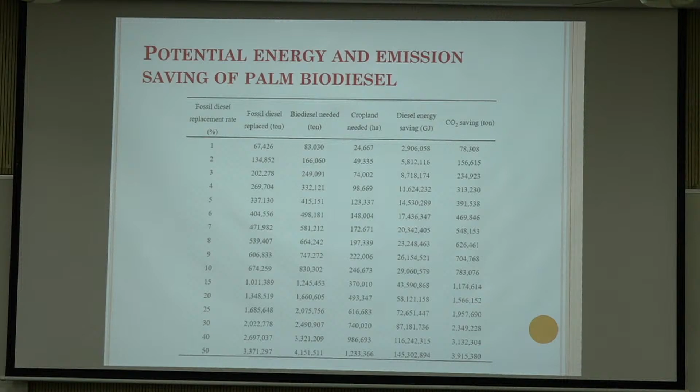So we also did the potential CO2 that can be saved, the life cycle analysis. So what is the total component we need if we want to run a certain amount of biodiesel, to replace a certain percentage. This one is another interesting thing. Draw a line: the price of crude petroleum, the crude oil price, versus the crude palm oil price.

For example, if the crude oil price increases up to 125, and the crude palm oil price is maintained at 500, saving can be generated. Then if the crude oil price is 100 per barrel and the crude palm oil price is 1,000, subsidy is required if we still want to use the biodiesel. This is what we are doing.

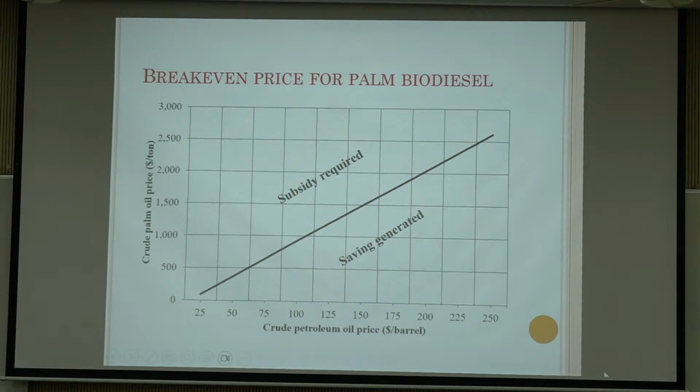No, not necessarily. It's not necessarily. Sometimes, looking at this chart, you can see very clearly: if this grows and then that grows, until what time, what price, then you cannot take it anymore. This one, the saving generated, you can assume is the profit that you can have. This one is maybe the margin, then the loss.

Yeah, this one can be changed to any feedstock price. The concept is the same. Then this one can be changed to, for example, the Jet A1 price. This one is your feedstock price, for example. So yeah, this one I don't have time to show you in detail.

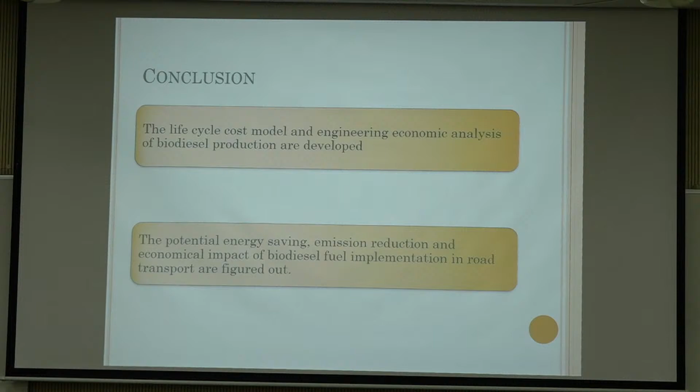Yeah, this one. So any other questions about the costing analysis? For the biofuel, no. At this moment, we don't. The production cost for the biodiesel is such that they can still get a profit, at this moment.

But during 2010, because the crude palm oil price was relatively high and the crude oil price was relatively low, many factories went down during that time. So now those left over can still survive. Now in Malaysia we already have the mandate that we need to use 10% biodiesel. Previously we wanted to increase to a higher rate.

But there are many other issues, like what I mentioned before: the car manufacturers don't want to provide the car warranty if you are using more than a certain percentage. Car manufacturers, this one, and many other things. Yeah, it depends.